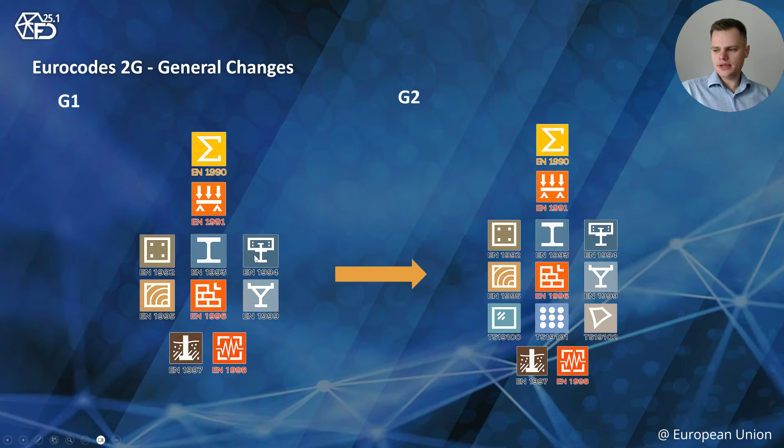You may also ask when we will have the new codes, and the simple answer is now. We are already past the first of the key dates, the date of availability. This is the date when all final versions of the code should be ready and after formal voting. Right now we are in the middle period, the publication period, until the end of September 2027.

All codes on the national level should be published, and then we have only half a year, six months, to withdrawal of the existing generation of the codes. So you can notice how tight the schedule is.

I made a short summary of how many changes there are in the codes, by simply adding the pages part by part. You can see we have over 47 parts in the new codes, over 8,300 pages—this is 70% more pages than the first generation, so a pretty big improvement in page count. For sure, you don't need to read every page from the new generation, but whatever you are designing, it will affect you anyway.

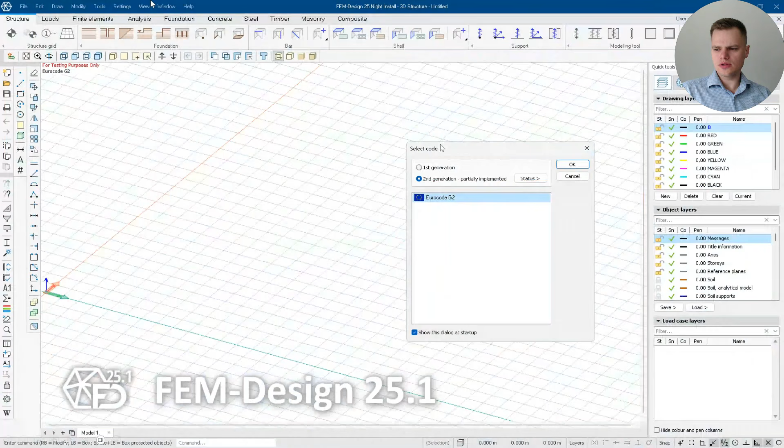In the software, it looks like this: you can select the generation in the dialog at the very beginning when you open the program. You can also check the status of the implementation. You can always change the code in the settings as before, and in every view you can quickly check what code you are currently in at the top left corner.

And we are going towards the changes. Firstly, Eurocode 0, so load combinations. Please be aware that all the changes we are going to present are from the basic versions of the codes, so national annexes may change things a bit in your country.

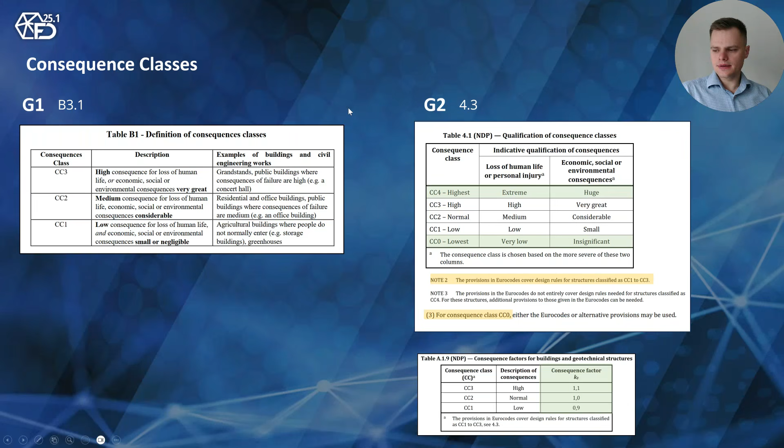First, changes in consequence classes. Previously we had 3 of them, now we have 5. But Eurocode still covers only the middle 3, although you can use Eurocode to design also for consequence class 0, staying on the safe side. These consequence classes are now more strongly connected with the load combinations and more used due to the consequence factor. More on that later.

If you are designing anything from a simple storage house to a high-rise building, you can still use only Eurocodes. But if you are designing something like a nuclear power plant or dam, you may need something more.

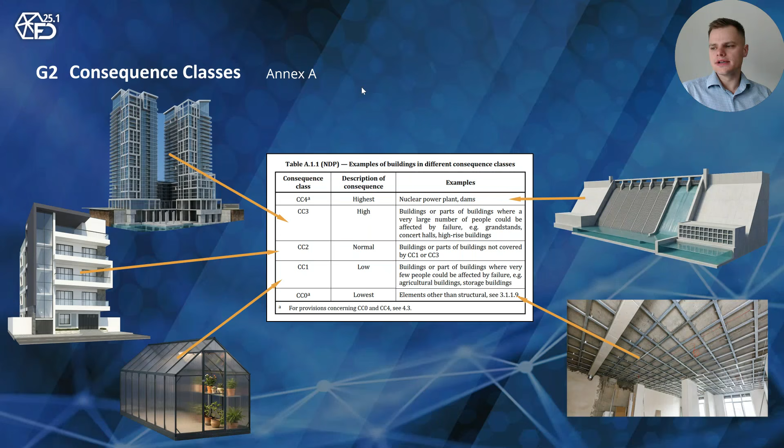On the next slides, I will present some changes in the load combinations and in the load combination factors, and all of this will be based on the ultimate limit state example, so please be aware.

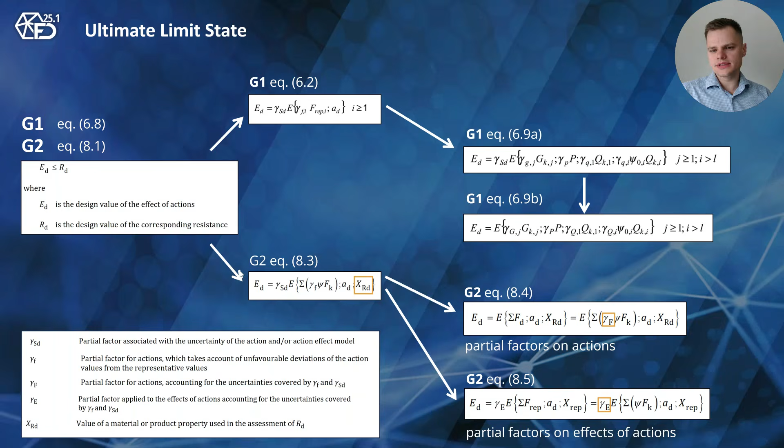In the equation, you have a lot of partial coefficients next to every type of action, and this is still the same in the updated code. You have gamma F, the partial factor on action. What may be new is the partial factor on effect of action, gamma E, and this seems like a new thing, but actually it's not. In the previous code, you already had information that for specific types of analysis and structures like ropes, cables, and membranes, you should use gamma F for effect of action. Now it's the same, but stated in a more elegant way, with separated naming, gamma F and gamma E factors.

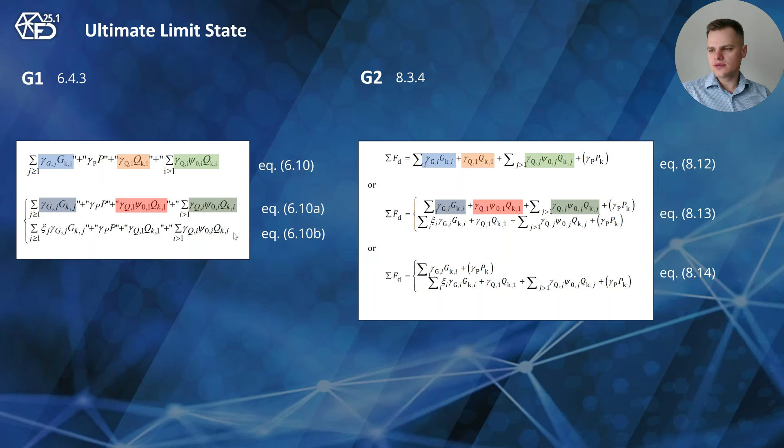You can notice in the equations that right now we have 3 sets instead of 2. New equation 8.12 is the old 6.10. 8.13 first part is 6.10A, 8.13 second part is 8.10B, sorry 6.10B, and the new set is 8.14, but the second part of 8.14 is 6.10B, and in the first part you have only the permanent action.

Next, changes in the coefficients are based on the building annex. Also here you can see that in the new code you have in Annex A more parts for all different kinds of buildings, so all partial factors should be in one place.

The combination factors table is now much bigger. We have the categories F and G connected for vehicles, and also coefficients for vehicles heavier than 160. Some small change for category H, new categories for roof with access, new category for stairs. Terraces, balconies, construction actions, icing, water actions, and waves are also included in the same table.

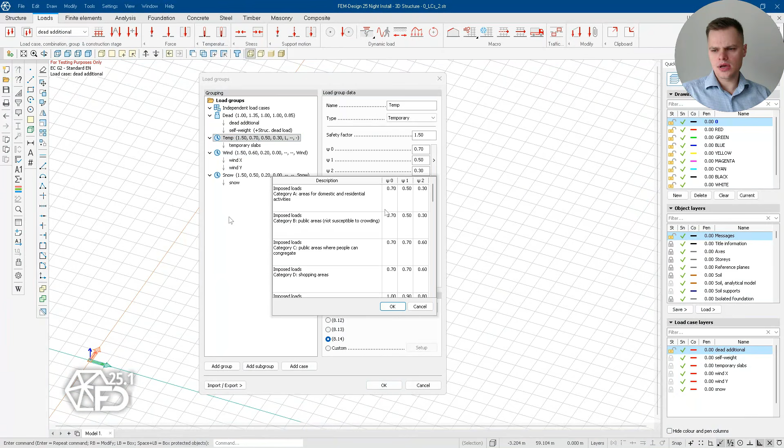In FEM-Design, it looks like that. You can select consequence class and consequence factor here. You can see all updated equations are included. For any load group, you can select from the updated load category table, and as always, you can quickly generate combinations from load groups according to the updated codes.

The new thing may be the single source principle. In short words, the point of this principle is that if your loads are correlated with each other, you can consider their effects together.

It may not look like a new thing and seems natural, but you also have information that for self weight of the structure ground, it's usually like that. But if the permanent action has both favorable and unfavorable parts, you can use this principle only when the structure is non-sensitive to this change of the spatial or magnitude change of this action.

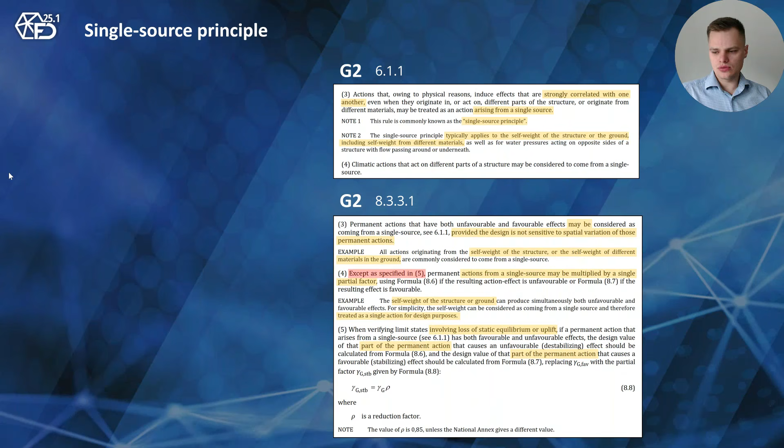And you have also information that when your check is with static equilibrium or uplift check, you should split the permanent action into stabilizing and destabilizing parts.

I have an example of a simple beam here, with a cantilever part, and we are going to talk about the bending moment in the span. From dead loads only, with the single source principle, so using the same partial factor for the dead load action, you can see some bending moment. But without this principle, you get a different bending moment, and this difference is pretty big, 46%, when we add live loads.

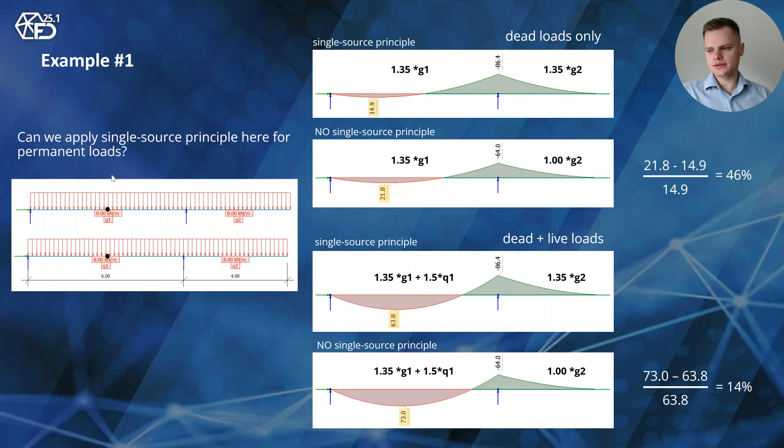This difference is much smaller, but still may be significant in your design. So, in my opinion, usage of this principle is always at the designer's choice.

Next, in the old code, you had different states in your design: geo state, STR state, EQU state. It's not the case anymore. We now have verification cases from verification case 1 to verification case 4.

Verification case 1 is the structural resistance in both structural and geotechnical design. Verification case 2 has two parts, A and B, and this is loss of static equilibrium and uplift, or strength of an element when it is connected with the equilibrium check. This is also connected with the single source principle, and verification cases 3 and 4 are due to geotechnical design.

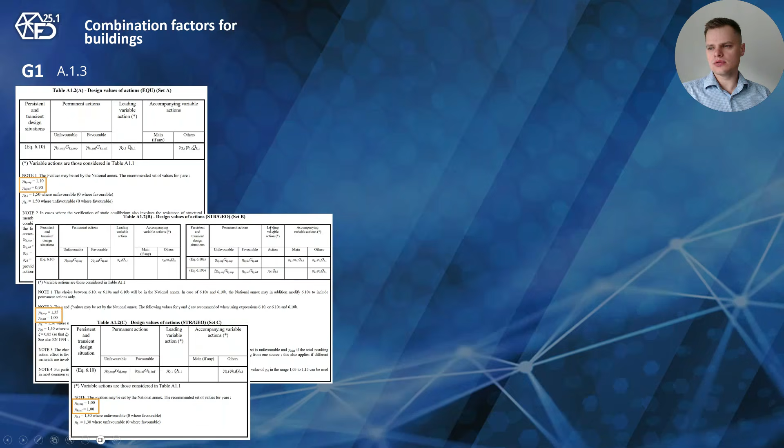So we can say those three sets, three tables from Annex A in the previous code are now in only one table. This table is big with a lot of notes below. I will focus on the most important, in my opinion, parts of the table.

But it's pretty similar to before, so we can say there is a sequence B, A, C of the previous tables. The most important thing maybe is that the base partial factors are still the same, so we have 1.35 for the permanent actions and 1.5 for the variable actions. You can also see in the table KF, this is the consequence factor, and this consequence factor is not next to every factor, but only next to some of them.

So please be aware. The next change is adding water as a separate type of action with a bit different coefficients. And you can see that for every verification case, from verification case 1 to verification case 3, for favorable permanent action, it's always 1.0.

Assuming you are not designing the geotechnical structure, important for you may be verification case 1 to 2. How to understand it: verification case 2b is like you have the basic case, but you treat all the permanent actions as favorable. Verification case 2a is maybe more complicated. It's used only when you have a permanent action with a stabilizing and destabilizing part. Then for the stabilizing part, you have reduced factors.

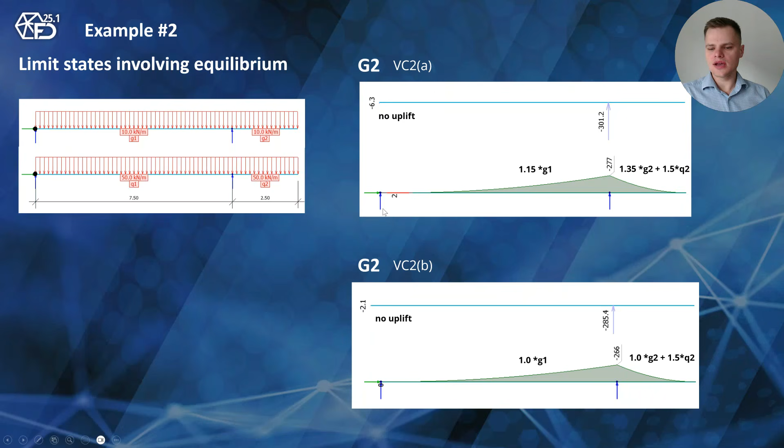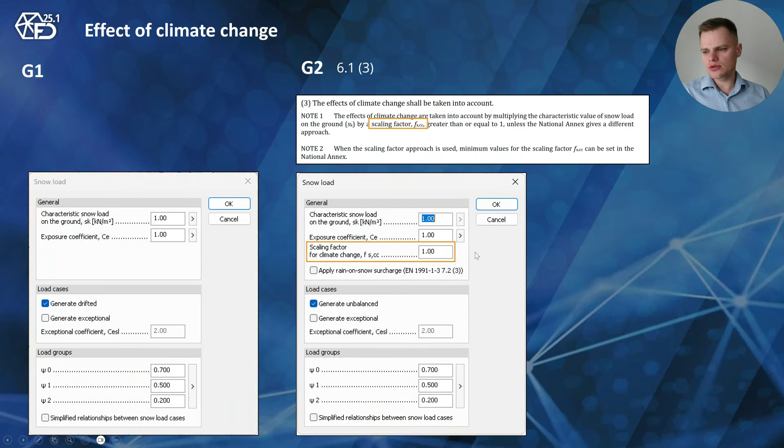Next change, snow load, so Eurocode 1. The first thing new for you may be the scaling factor due to climate change. It's included in the updated FEM-Design here. It's 1.0 for now, but maybe bigger in the next years. Next change is for flat roof.

You may want to use rain on snow surcharge load, and if you tick this button in FEM-Design, it's done automatically. You can also notice some small difference in naming, so drifted is now unbalanced load for snow. We are following the updated code naming.

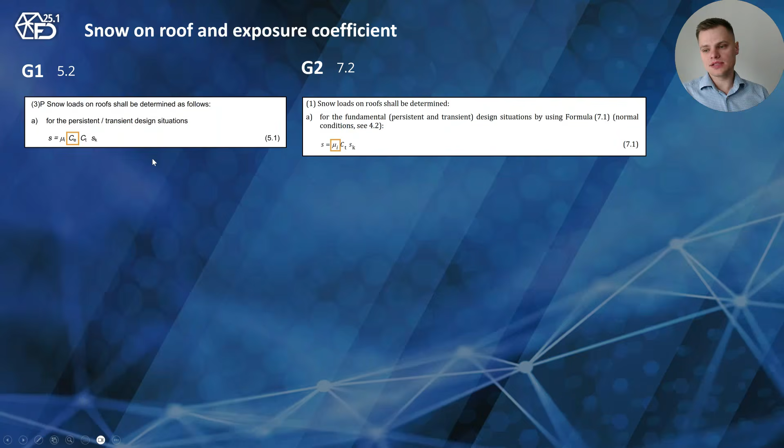When we take a look into the snow on roof basic equations, you can notice one big difference here: no exposure coefficient in this equation. But the exposure coefficient is still in the updated code as it was before, and is also included in FEM-Design, so it has to be used somewhere. And it is, I will talk a bit about that later.

For flat roofs, in every case you had the 0.8 coefficient, it's not the case anymore. It's 0.8 times exposure coefficient for flat roof, so here you have this exposure coefficient hidden. So you may say this shape coefficient is not shape anymore, it's shape plus exposure, and the exposure coefficient for flat roof is not exposure coefficient, it's more complicated.

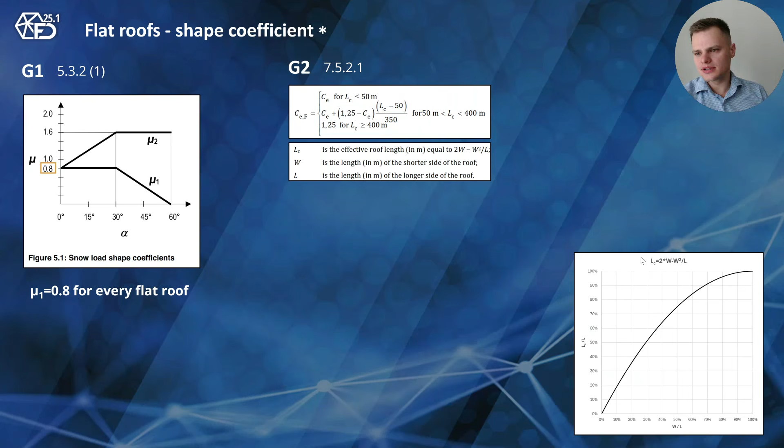This value varies between the exposure coefficient and 1.25 based on the effective roof length, and this effective roof length is calculated from an equation like that. And 1.25 is not random, this 1.25 times 0.8 is exactly 1.0. So from the falling snow perspective, it's like falling on the ground, so a big roof is like the ground right now.

And what is the difference between the codes? We have also a chart like that.

For roofs, when the effective roof length is lower than 50, you have no difference, and then the biggest difference is for roofs above 400, and it's up to 56% change.

Between codes it depends what exposure coefficient you used before. I made also an additional analysis, so the simple rule may be: if your longer side of the roof is lower than 50, or the shorter side is lower than 25, then it's like the old code.

So you are in the first part of the chart. And the good news is that FEM-Design calculates this automatically for you, whatever roof size you have or whatever shape you have, the proportions of the roof dimensions.

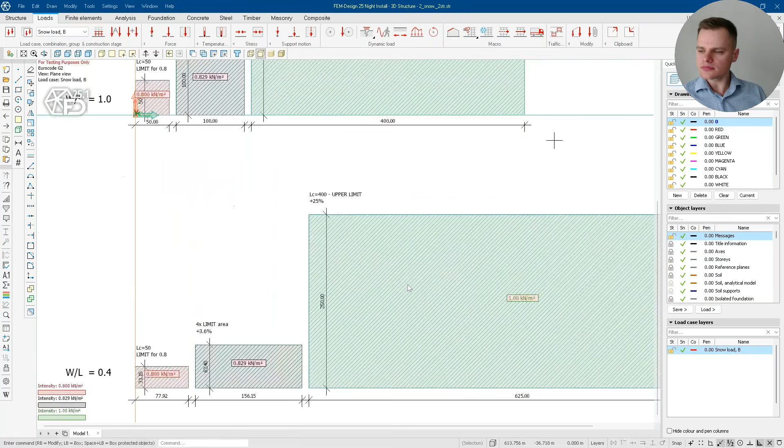After you add the climate panel for flat roof, you can quickly generate the snow load, and depending on what size it was, FEM-Design calculated it automatically. You can see here this from 0.8 to 1.0, so the load on the ground for the bigger roofs.

Next change for pitched roofs. We have still three cases. Case 1 is similar, but case 2 and 3 are different. You have snow load on one side of the roof, so no half of the snow on the other side.

This is the change in arrangement, but there is also a change in the value. After you add the old line to the new chart, you can see the difference in the maximum slope of the roof — this is 70° instead of 60 — and this orange is the exposure coefficient influence. The biggest change is for 30° roofs, and it's up to 50%. So also maybe significant.

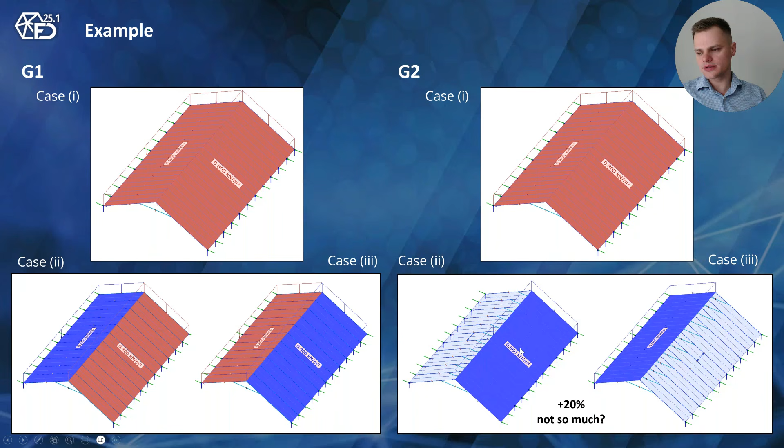Please remember, you have the arrangement change and the value change. So I have a simple example here: a dual pitch roof with the same snow load value in case 1, but in case 2 and 3 you have a 20% difference, so from 0.8 to 0.96, plus the change in arrangement.

And the result changes even bigger. It's 93% when you compare the maximum displacement of the roof structure, so pretty big change, and it's 61% in bending moments in my case, of course. But I think when you have a situation like that, 30-degree or close to that slope, there will always be a change in your roof load.

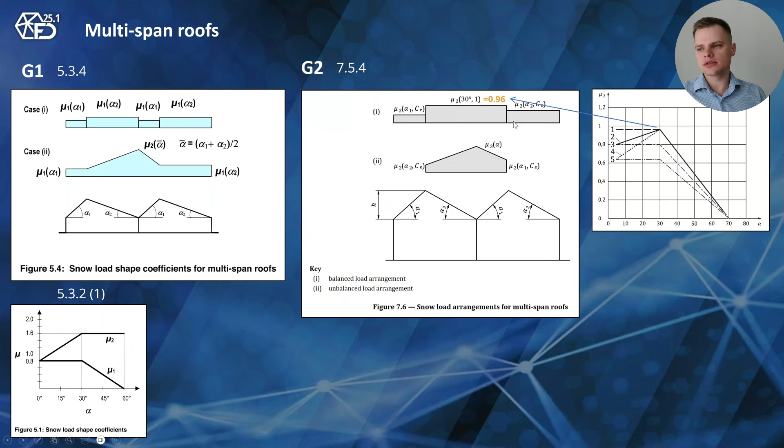Next roof, multi-span: you have a change in both balanced and unbalanced load. For balanced, you have a constant coefficient in the middle part, and for the unbalanced, you have different arrangements, so only the snow in the middle of the roof, and also more conditions.

Also due to the height of the roof. So we might say that right now the load is not following the line; it's following the area below the line, and also the basic coefficient is higher — so we are starting from 0.9 instead of 0.8.

Next, maybe not a change but a new thing in the code: flat roof with tilted panels. It's added, you can calculate it now. And also new, roof close to a taller construction. It was always in the code, but right now we have a detailed calculation method for the constructions when there is a gap between them.

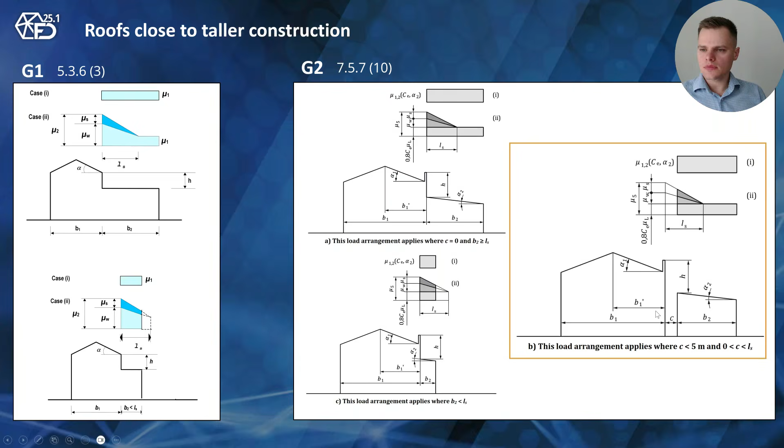Also, a good thing here is that all those changes I mentioned are right now included in FEM-Design. You can see a bigger configuration dialog here, and I have a short example.

I am adding the climate load panel with tilt for flat roof with tilted panels. You have to select the slope of those panels, then you can change the height of those, and after that you may want to configure additional edge objects.

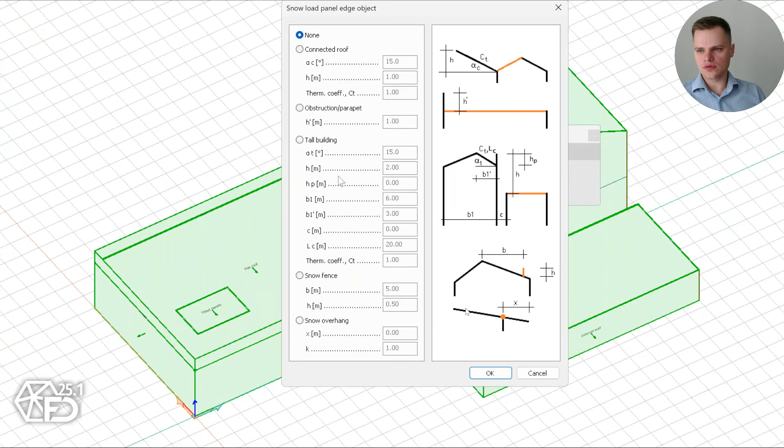I did it before, so I just generate the load, and you can see all the load cases are there due to all kinds of different checks — also the tilted panels, also multi-span roofs, everything there — added to one load group with custom load group relationships, ready to use in your design.

Next, Eurocode 2, so concrete design. Concrete and table 3.1 — I'm sure you know this table, and this table is named 5.1 now, and it's much smaller as you can see, but I made it bigger so we can directly compare and see the changes.

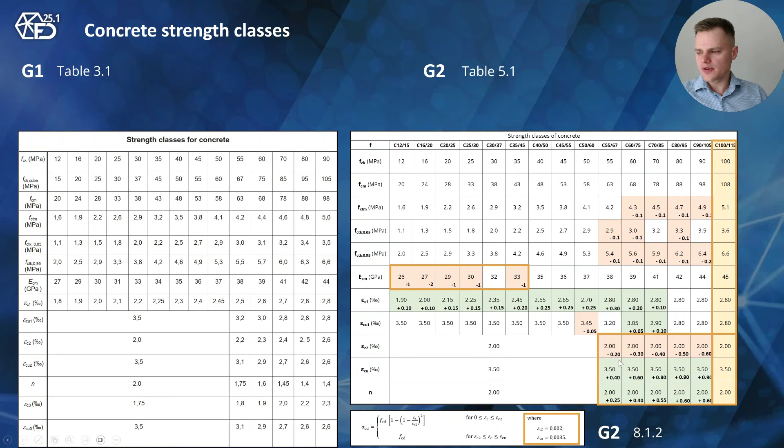And maybe we can focus on three areas only. So the new concrete class, C100/115. The Young's modulus for the lower class concretes is now lower, and we have unified compression strains for all classes, so 2.0 per mille and 3.5 per mille in your design.

When we are comparing the design compression strength, we can see more differences here due to the additional ductility factor. So for every concrete class above C40/50, we have a difference, and it's up to 20, almost 24%.

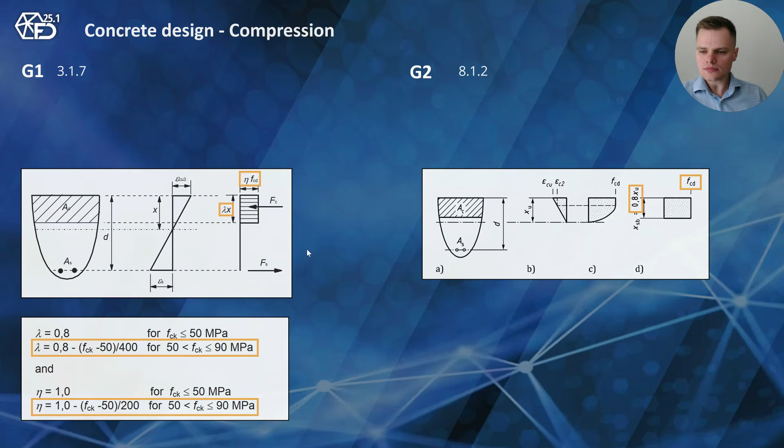You can see the comparison here, and it looks nice in the presentation, but it's not totally fair, because when we take a look at the simplified compression stress block distribution, previously we had two additional factors: the effective strength and effective height factor. It's not the case anymore, so we just have 0.8 and the design compression strength. After taking this into account, the difference is much smaller. It's still there, but much smaller.

The next change connected with the concrete classes is the strength reduction factor in shear. In the old code, it was always connected with the concrete class, the concrete strength. It's not the case anymore. You can see that it's included in the new code in many places with different values, but in no equation is there FCK.

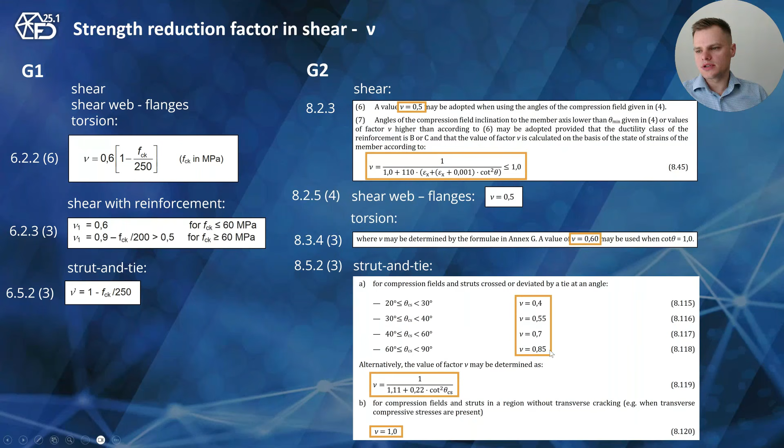Okay, thank you, this is all from my side. Yoni will talk a bit more about shrinkage and creep calculation according to the new code.

Thank you, Jan, for the presentation. I will mostly talk about the modifications in concrete design. We start with shrinkage and creep, and because the new Eurocode has an annex which defines those models, we have implemented them in FEM-Design.

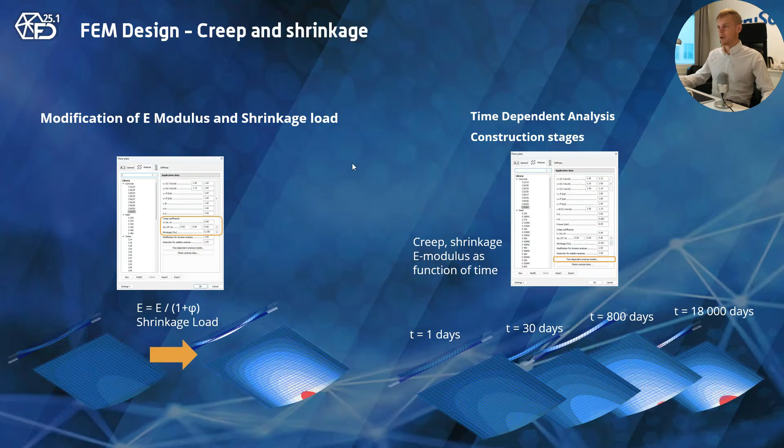First of all, we have two methods in FEM-Design to take creep and shrinkage into account. We can do static or quasi-static analysis with modification of E-modulus and shrinkage loads, so everything will shrink and curve if you have rebars or unsymmetrical rebars. Then we have time-dependent analysis with construction stages, and you get results of all those intermediate stages. Those new models of the new Eurocode will work on both. They're under the properties of walls, slabs, beams and columns, and if you click those, it works for both.

The creep model is not that different, but the shrinkage model gives a bit slower early drying with the new code, especially if you have an accelerated construction schedule. This might be important for you. So it's less aggressive in the beginning with the new code, but eventually the new code will catch up.

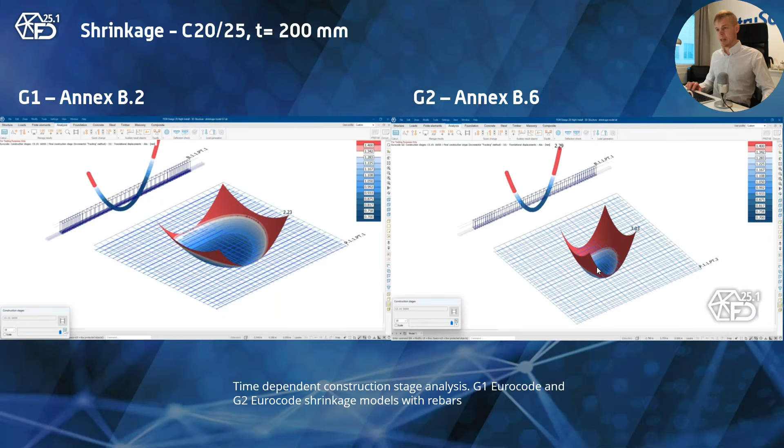I have an example here: the shrinkage model, and you can see now they follow Annex B.6, which is the new code. The left side is the old code, so it will shrink faster in the beginning and curve faster, but in the end the new code will catch up. Here's an example of TDA analysis, and it's a good demonstration of how they work.

Then we have some modifications in the minimum reinforcement calculations and detailing rules of elements. First of all, the Eurocode divides the minimum rebar checks into two sections. The first is for crack control, where you have predictable crack behavior and predictable deformation behavior, which is important for long spans and crack-sensitive structures like water retaining structures.

The second part is the minimum according to detailing rules, important also for long spans, but also short spans. So if you have a high stress part and low span length, the latter part will govern so that you have ductile behavior after cracking—there's no sudden drop in stiffness. The idea is that you design rebars to ensure ductility, so the curvature-bending moment curve is sloping upwards all the time.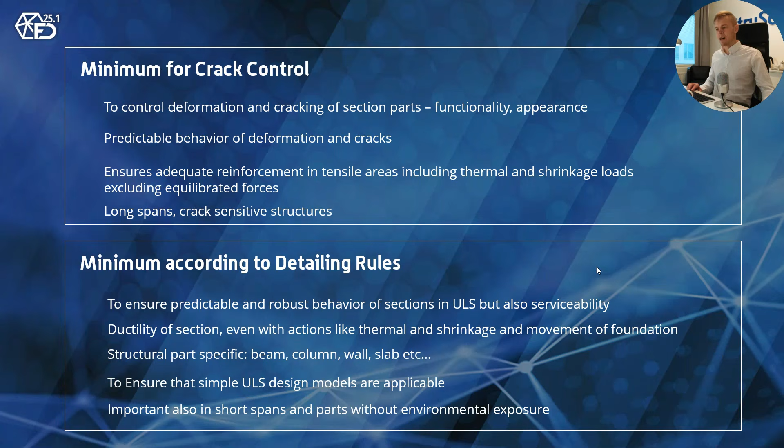So we have a few new equations. I won't go too deeply into these first ones—it's just the minimum for crack control, which is important because we calculate the exact cracking in FEM-Design. The rules have been modified a bit, but there's no dramatic changes. We also have a new simplified method if you want to simplify your life.

There's Annex X, which is a totally new thing, and you can look into it yourself. Here's the content of Annex X and how it simplifies those equations. But let's go to the parts which have been implemented in our software.

First of all, the old code used to have stress checks for elements. This meant that if you had a lot of compression, you tried to limit it to avoid longitudinal cracking in certain exposure classes. Or if you wanted to avoid yielding of rebars, you had certain stress limits for rebars, and they were in text format. The new code will be much more user-friendly—that was one of its goals—so now you can see they've put it in a simple table, one for the rebars and one for the concrete.

So if you have to do those stress checks, now they are in one single, stable and easy to use location. So how do you set up them in the new version of FEM-Design?

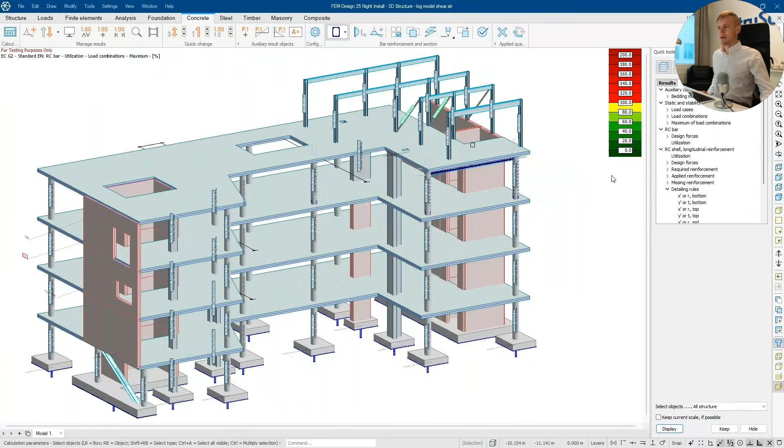First of all, here in the total concrete settings, you can set those stress checks. Second, we have one more setting under the members - under the slabs, beams, and walls - it's here, the stress limit for the concrete. And finally, you can have them in the main report. Previously, they were in a separate table in the reporting module, but now they are part of the main report of the elements, and you can see that now they have been implemented there.

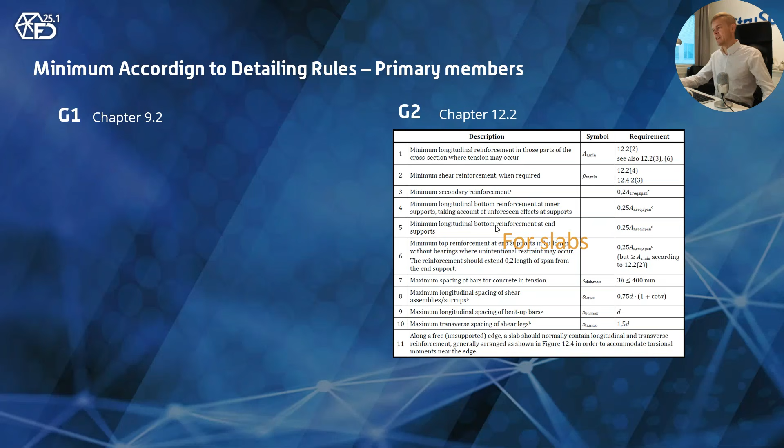Then we can talk about detailing rules of primary members. In the previous code, they were scattered all around the code. So if you want to design a beam, or a column, or maybe a wall, there's a lot of rules. And now if you look, you have one simple checklist for slabs and one for the beams. It's really handy because you have a single checklist as a designer - you just go through the points 1 to 12, and then you have detailed your beams.

And there's one new thing: if you have a really high beam, over 600 millimeters, you have to add a few bars on the sides of the beam to avoid cracking. So that was not there before, but it's good that it's a clear list for the designer.

Then the minimum rebars for the beams and slabs, to prevent or ensure the ductility of the members - previously it was a simple fixed formula for slabs and beams, but now it's more complex. So the new code says that you either have to design against the cracking moment, or if the stresses are below the cracking moment, you have to leave some safety margin for the cracking moment.

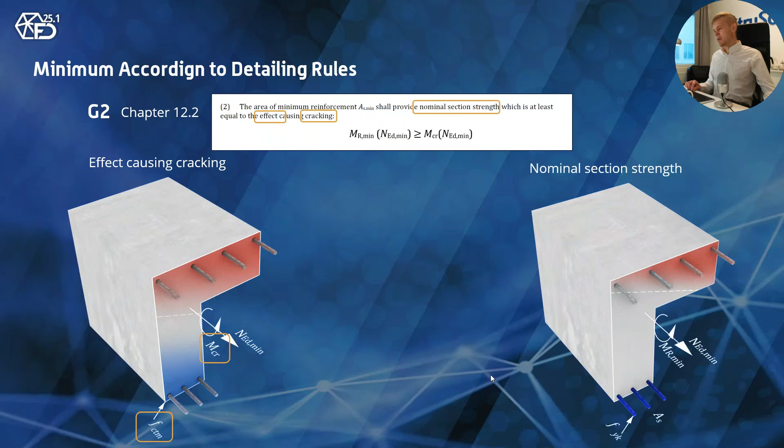What it actually means is that you have to take the normal force of the section, and then calculate the cracking moment with that normal force, and then design your section capacity. So minimum rebars is now a capacity against the cracking moment, which is a better definition of what really happens. It means that if you have a lot of tension, you need more minimum rebars compared to the old code, and if you have compression, you need less, to guarantee ductility against the cracking moment.

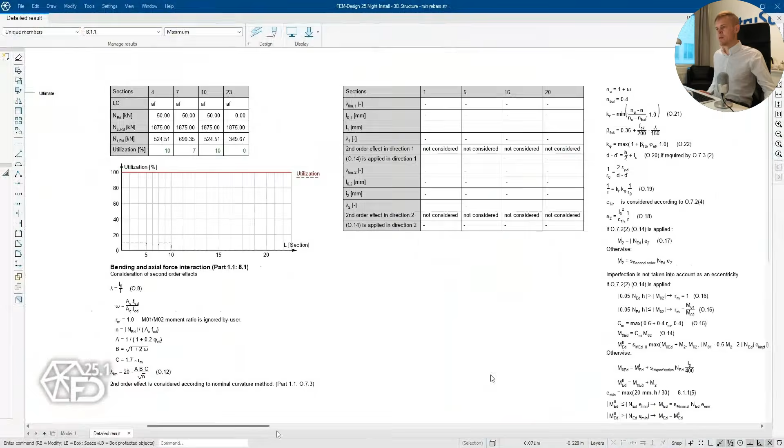And how it's done in the new version of FEM-Design: if you go to the properties of the slab or beam, and go to the report, to the minimum rebar section, you can see that it's now following the rules of the new code. Instead of taking this fixed formula, we are calculating the cracking moment for the certain normal force. And of course, if you have just tension, then we design the minimums against the total tensile capacity of the concrete.

Now the new thing is that we do not see square millimeters in the table. There's the state - is it cracked or not - and there's the cracking moment, but we see the tensile capacity. So here's the requirement, and then there's the capacity. We only see how much capacity we are getting, the tensile capacity of those bars, and that is the minimum rebars in the new code.

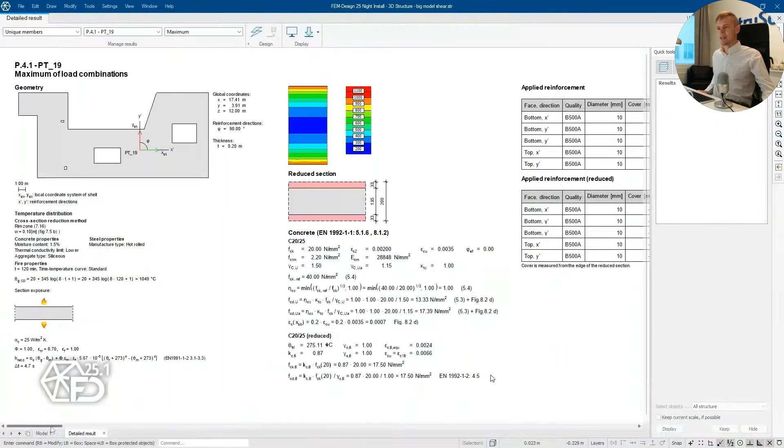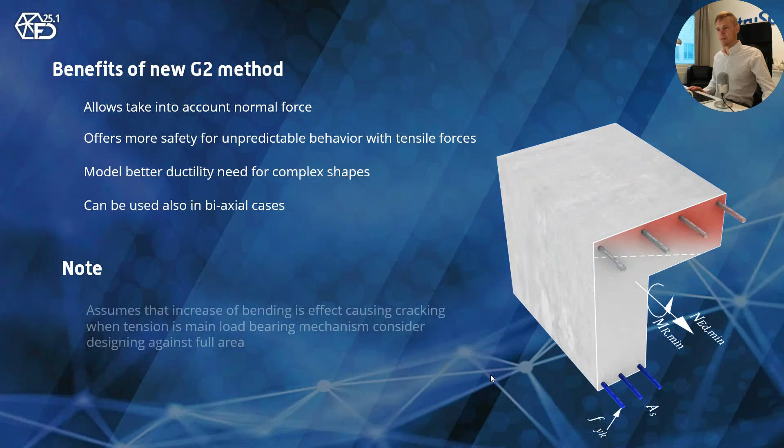A few notes: it allows us to take into account the normal force, and gives more safety if you have a lot of tensile force, and it's better for complex shapes because you can apply this method to any shape and biaxial cases. But of course, if you have small bending and the main loading is tension, I will still design those minimum rebars against the tensile capacity of the concrete to ensure the ductility of the section.

Then we have a few modifications for crack calculation. So we have an effect of stabilized cracking, and also a better understanding of the transfer length between those cracks.

So let's take a case: you have a foundation which has been cast a lot earlier before the base structure. And the new dialog in the software will ask you this - is this an edge case or is this a tie case? And it can be confusing in the beginning, what they mean by tie and edge.

But let's now cast the walls to the structure. So these are cast in situ concrete, and now they are connected.

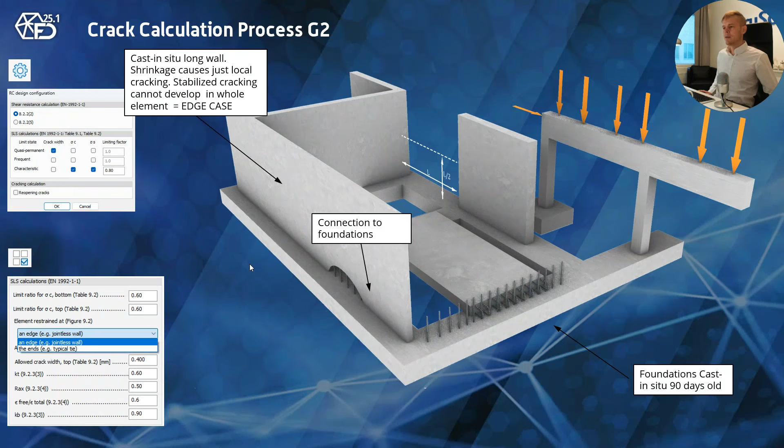Of course, when shrinkage happens in the concrete, it will cause a lot of tensile forces in the bottom part of the wall and compression to the foundation. So it means that if the first crack appears in the wall, the stresses cannot balance in the whole wall. The first crack will not release the stresses in the wall, and that is why it's the edge case.

So every time when you have something preventing the movement of shrinkage at one or two of the edges of the member in the direction of the shrinkage, then you have the edge case. So edge case is more about the cracking due to shrinkage which is restrained.

Then you have the tie case, like a floor slab connected between two massive foundations. It's only connected at the ends, and if you have cracking or a first crack in the middle of the slab, it will release the stresses in the whole element. Then a second crack appears, then a third and fourth, and suddenly there's like 30 cracks, and the stresses are balanced. So it means it's a fully stabilized cracking.

Also, if you have external frames or a floor slab over the walls, then it's also a tie case. So this is a tie case, this is a tie case, and if you have a wall cast between existing structures, if it's a short wall, the bottom part will be the edge case, and the top part is the tie case.

And the ratio limit is L divided by 2 in the Eurocode, so it depends how you want to design the cracking.

The time factor, KT, is now also not only a function of time, but also of whether it's the formation stage of cracking or fully stabilized cracking. So it's no longer fully bound to time.

And then you have a new bonding factor here to take into account the bonding conditions of the rebars.

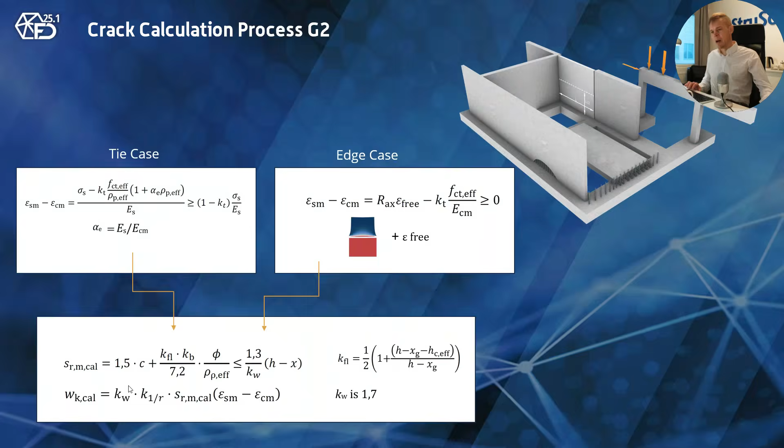And here's how it's implemented in the software: if you look at the beam, first the cracking limit state is set here, and then we have this setting of edge or tie, and if it's a tie or edge, you have to apply R and other properties. In the report, you can see that now it uses the new formula.

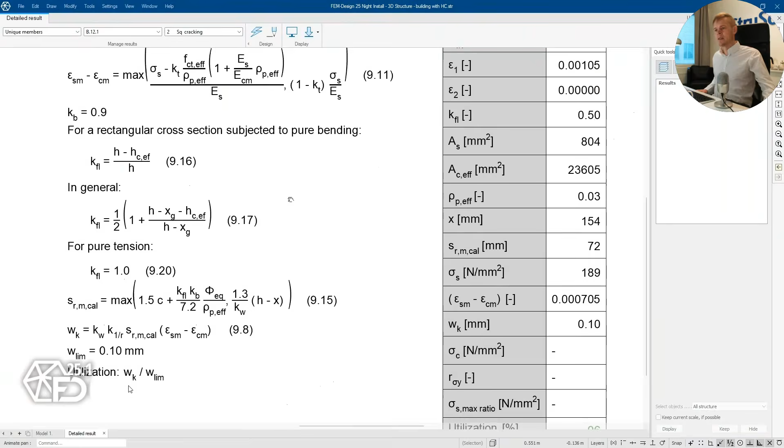Here's the utilization of the cracking. If you go inside the design report of this beam—and it works equally with slabs and walls—you can see it's a tie case, so it's not prevented at the ends, only tied at the ends, and then you get your utilization for cracking.

Shear design is probably the thing which changes the most with the new code, so it's more unified across all the shear design tasks.

In the old code, we have this formula, and if you look at the new code, it doesn't look that different. But if you actually look at what's happening behind the scenes, previously we used an experimentally calibrated formula for shear design. Now the chapter is different, but also we are using critical shear crack theory, and instead of comparing the shear force, we are comparing tau, which is shear stress in plates and beams.

A problem with the old code was that it was used beyond its original calibration scale. So with thick plates, it was too unsafe. And it doesn't take bending into account, because bending will open cracks in the top part of the plates or beams, and the new code will take bending into account.

Also, one problem with the old code was that it was difficult to design foundations, because foundations required iteration of the perimeter, but we will go deeper into that in the shear design or punching design section.

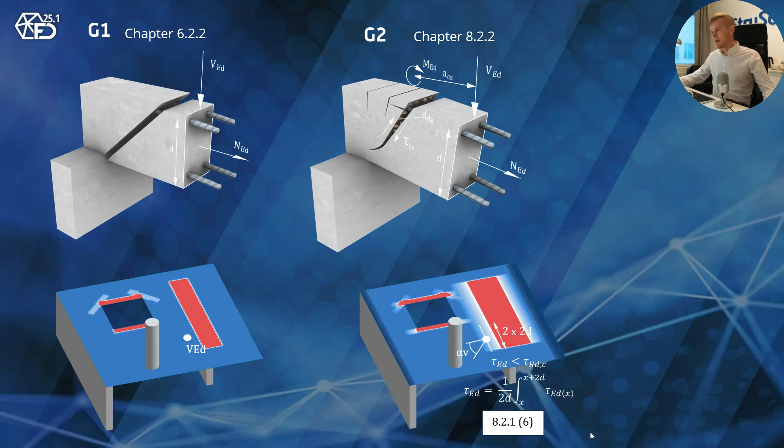First of all, in the old code, we just took the shear force of the plates or beams, but the new code has more plate-specific rules, so we can average the shear, we can look the angle more. So if you look at these rules, also how you handle rebars has changed a bit, because in the old code the requirement was fully anchored rebar, and in the new code we can take the effective rebar.

So this is the effective rebar data model of FEM-Design. So we actually can take the anchorage into account in the shear capacity. And if you look at those plate-specific rules, we have a lever arm, which is for each of those finite elements will get a different lever arm. And also this is the formula for the shearing angle.

And a totally new concept is the ACS, which is shear span. So it's a ratio between the bending moment and the shear force in the plates or beams. And that takes the bending into account. So this is actually the distance to the contraflexion point of the bending moment. So bending moment 0 point, or where you have to place your shear force, so the bending moment is 0. So that's the distance to the contraflexion point, or shear span.

Then we calculate the shear span factor, so that is a new thing. And also one new thing, well, KVP takes the normal force into account, but also aggregate size, because this new critical shear crack theory will take the shear with the 2 or 3 mechanism. First of all, we have a doweling action of the main rebars, then we have an action of aggregate, and then we have a compression strut to the support. So there's like 3 mechanisms to carry the shear. And we modify this value with these factors, which is KVP and the shear span factor.

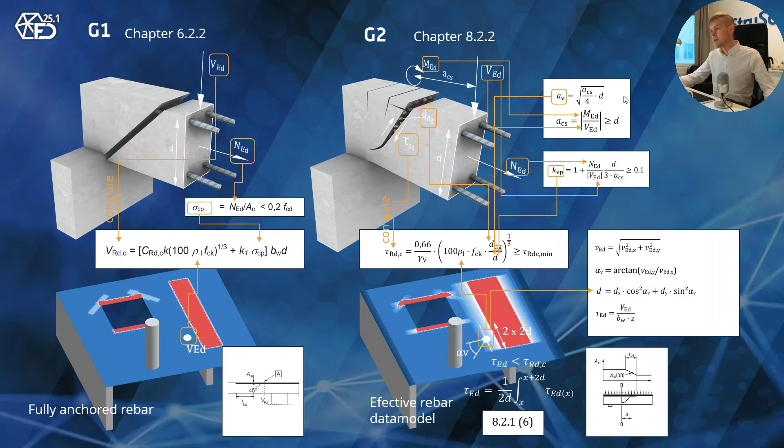So how can you do it with FEM-Design? Let's look at how it's implemented. And here we are shear designing the plates, but it's exactly the same if you design beams. There's the cotangent, we will go deeper into that in the later sections of this presentation. But let's look at the results of the shear design of this plate outside of the punching regions.

So we can see VED, but we can also see tau. Tau is the shear force or shear stress of the elements. And if we go inside here, let's look at what is inside of the report.

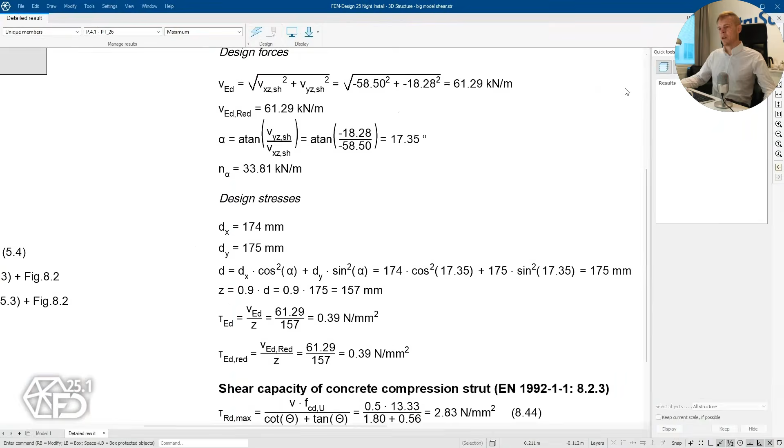So first of all, we can see we have implemented these new rules, so the shear force rules and shearing angle, and the normal force in that shearing angle. Then we calculate the lever arm with the new formula, which is a function of the shearing angle and also the Z value. Then we calculate the concrete compression capacity, the strut part of the strut analogy with the cotangent value. And when we calculate the shear capacity without the shear rebar, of course, the effectiveness factor.

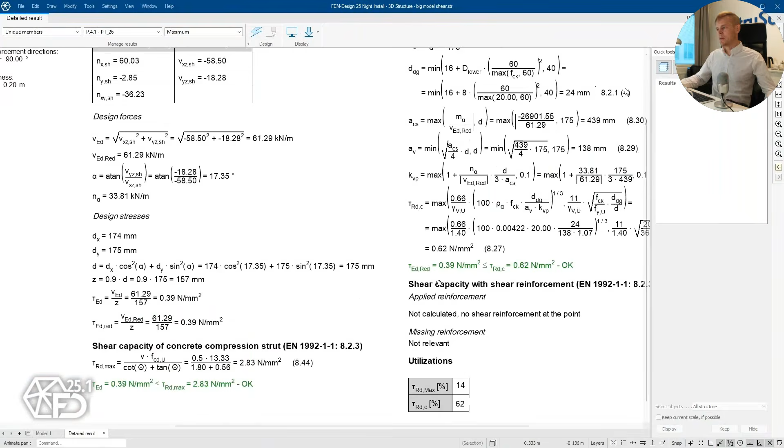But here they are, so the aggregate size is taken into account with the DG, and then we have the new property, the shear span. So we can say that we are about 450 millimeters from the contraflexion point. Then we take the normal force into account with the KVP, normal force in a certain direction, and then we calculate the shear capacity without the shear reinforcement in this plate. And then we get the final utilization with that data.

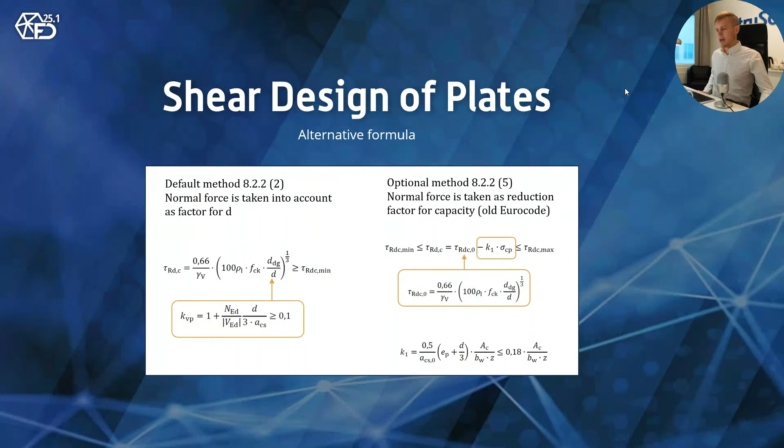And it's important, what I wanted to show, that you have to check the actual anchored rebar. So you have a data model of anchored rebar in FEM-Design, and that is really handy, that you get the exact right applied quantity to the shear design.

So we also have one alternative formula for how we can take normal force into account, and this is almost like the old code. So we have a sigma CP, compression or tension of concrete. More tension you have in your section, less shear capacity you have, and that's still in the new code. But this is an alternative method to the previous method. So we calculate this sigma CP, and we still take the shear span into account.

So if you want to go to this alternative design in the new FEM-Design, you go to the main settings of concrete, and it's under the main settings here. You go here, and here's the alternative method for shear design, and now it uses the new formula for how to take the normal force into account.

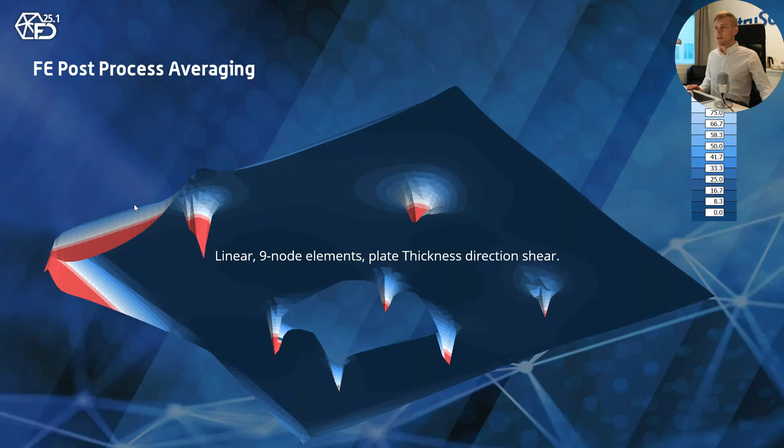Then we have a totally new thing: we can average the shear stresses. Typically when we have a plate, we have huge shear force peaks at the edges of the plates, corners, and of course close to the columns. This is very typical. And of course, anything calculated with the shell model beyond the effective depth of the slab is totally unrealistic, so you cannot take it into account.

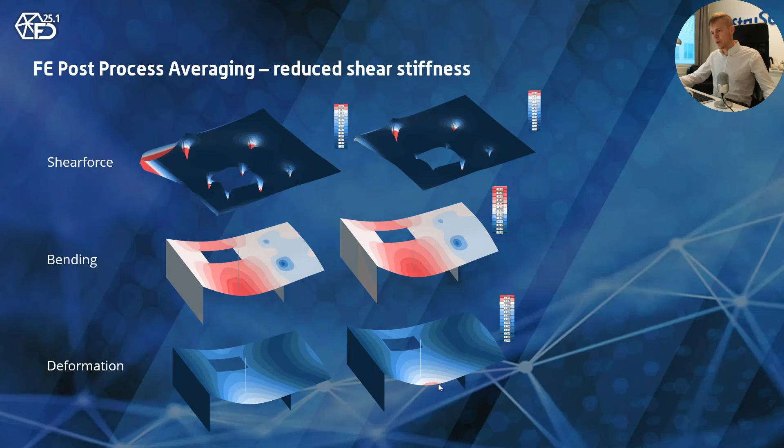What is new in the new code is that we have rules for this. One solution is that if you reduce the shear modulus, this is not in the code, but this is what you can do to reduce the shear stiffness, and that reduces those peak values compared to the linear model without any shear cracking. But the downside of this method is that the deformations will increase because there's more shear deformation. The new code will give you a method where you can average the shear forces over a distance of 2d on both sides of the peak value.

How can you do it in FEM-Design? Well, this is the end result when you average those shear forces, so the problem with the edges and hole corners totally goes away. This was the old tool we always had in FEM-Design, but the new code will give you exact values. So the 2d distance is the exact value for how you do it.

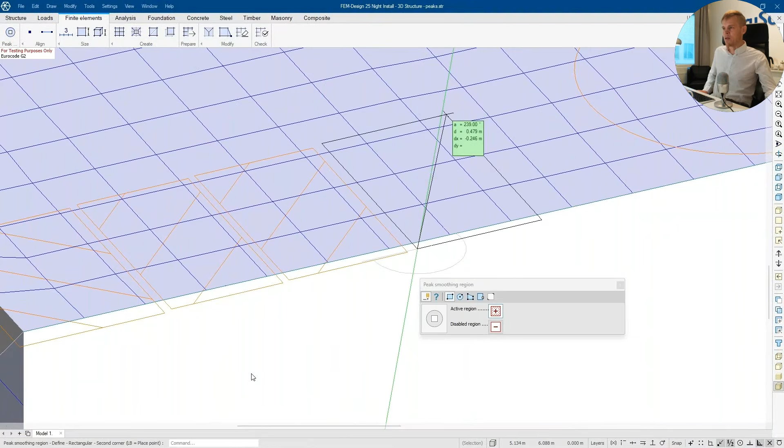So you just draw separate peak smoothing regions. They cannot touch each other, because otherwise it's considered one big region, like two-way averaging. We just want one-way averaging, so you have to set the constant shape function in the settings of the software, following the recommendation of the Eurocode that it's a constant shape along the average region. This way we can do one-way averaging in FEM-Design.

Punching is also one of the things that changes a lot with the new code, because the new thing is that the critical perimeter is much closer. If you compare the formulas, they are here: left side is the old code, and the new code is on the right. We have a bit different definition for the perimeter. Also, the old code has this problem that you have a beta factor which takes the unevenness of the shear into account, and the new code has put that beta into one simple table. So the readability of the code has improved a lot, because there were like 5 pages of how you calculate the beta in the old code.

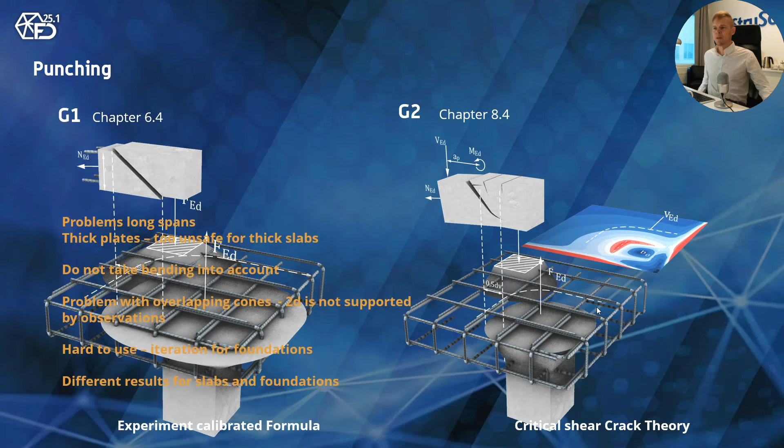So also here, we are switching to a critical shear criteria. The problem with the old code was that it was unsafe for long spans when there was a lot of cracking over the punching region. It was unsafe for thick plates because it was calibrated for thin plates, and it doesn't take the bending into account, because if you have a long span you have a lot more cracking. It was also hard to use for foundations because it required iteration of the critical punching perimeter. But that is no longer the case with the new code. That is no longer needed, and it always gives you different results for slabs and foundations.

Also you had this problem: if you look at this example, if you design foundations with slabs using the old code, they were always overlapping cones. With the new code, when we are calculating the punching only at a distance of 0.5 times dV, or the effective depth, we can find totally new failure modes in the foundations, because those cones are no longer overlapping in the new code. So it's more realistic, you find those critical modes, and also you don't need that iteration, so it's easier to use.

So this is the formula for the new code, and you can see that the formula is exactly the same as for shear design, so it basically should give you the same results. The only difference is that the shear span, how we take the bending into account, is a bit different. So you calculate the shear span in X and Y direction, and then you average those two into one number. The kn factor is still there for how you take the compression-tension into account.

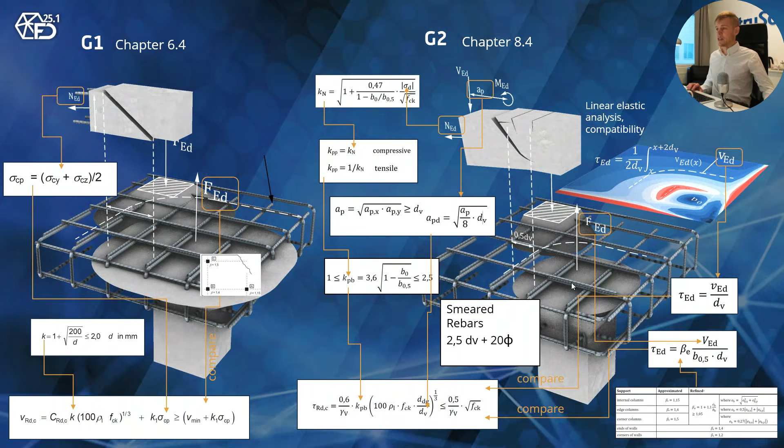And what else? There's a new method to take the shear forces directly from the plate and average it, but we'll talk about that later. Then we use smeared rebars, and we have to extend beyond 2.5 times dV plus 20 times the diameter. But other than that, it's basically the same. Now it's unified also with the shear design.

So here are a few examples of how you can use the nodal force method. In this method, we take the nodal force of the column or support directly, and in FEM-Design it's done here. You still have two types of punching: you have column-wall end punching, and then you have column punching. If you go to the settings of punching, we can set the nodal force method here.

So here we take the nodal force and then use the beta factor, which we can calculate automatically, or we can set it ourselves, just like the old code. So we take shear force, then we have a Kn factor to take the normal forces into account. The more tension there is, the less capacity there is, and then we calculate the shear span. So we are roughly at 800 millimeters from the moment contraflexure point. Then we have the aggregate size factor, DG, and then we can calculate the exact capacity of the section with this formula.

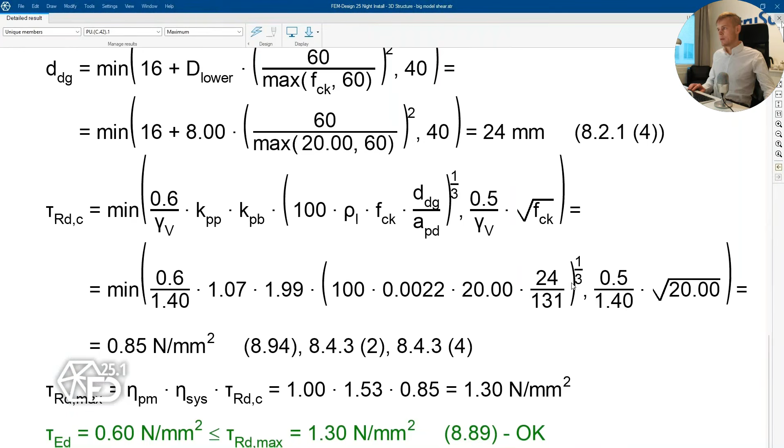Now maybe we take a more complex example of how we can reduce those regions. So here are the formulas for the punching calculation of the new code, and you can see that they have been implemented in FEM-Design. So the proximity of the holes will cut the outer perimeter, but not the inner, and then also the punching perimeter has to be stopped like half of the distance to the edge. That is also a new thing in the new code.

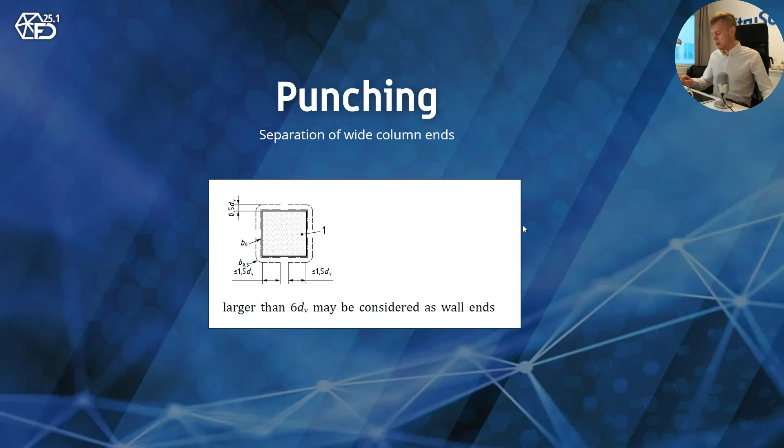What happens when you have wide walls? That's a new rule in the new Eurocode. If the distance is larger than 6 dV, let's see what happens. Here we have an example of a really wide wall in the model. We could do it as a column, but the downside is that it divides as it should and takes the mid part away. The real downside is that we get a single punching force, so it's really difficult to distinguish what is the right-hand and left-hand punching force. It's better to model the actual object as a wall instead of a column, because then you can separate and get separate design forces for end 1 and end 2.

Then we have the concept of smeared rebar and extension of rebars, and that is more important in the new code because we calculate the cracks so closely in the column head. There's a lot of cracking also outside of that region, so it's important to extend those rebars.

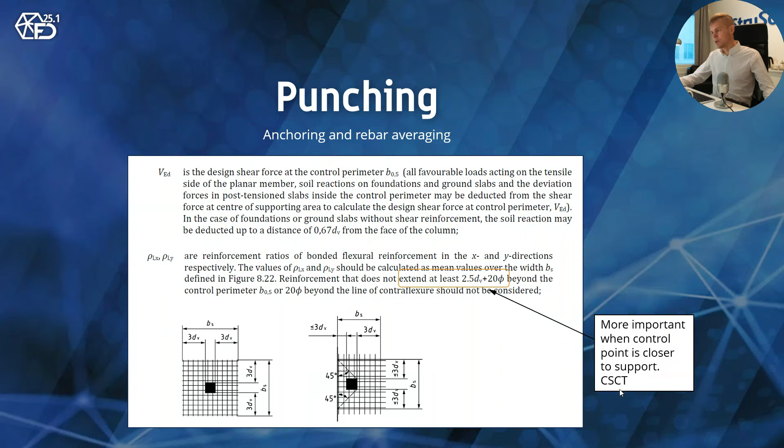Here we can see how it works in the new FEM-Design. If you go to the applied reinforcement, here we can see that we have applied some additional reinforcement over the column head, and here we have extended them way beyond the recommended distance. In this example, they are not extended to 2.5 dV plus 20 times the diameter, which is a proxy for anchoring. We check the report.

If you look at the mechanical reinforcement ratio, we get 0.022, which is just the base mesh quantity. If we go to the second column where the rebars have been extended way beyond the control perimeter, we can see now we get the full capacity of the additional rebars, so the reinforcement ratio will increase. So again, the data model of anchored rebar is much more important now with the new code.

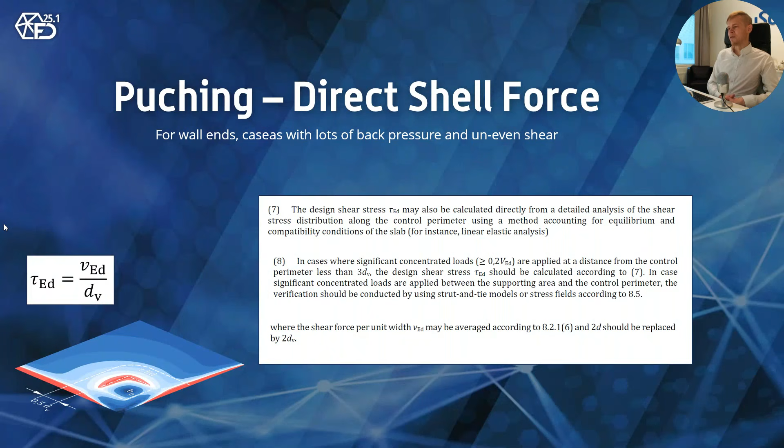Then we have an option in the new code that was not in the old code: we can actually take the tau directly from the finite element model, using a linear elastic finite element model to approximate. So we don't need the beta, we can take the unevenness of the shear force directly from the finite element model. Let's see an example of this behavior.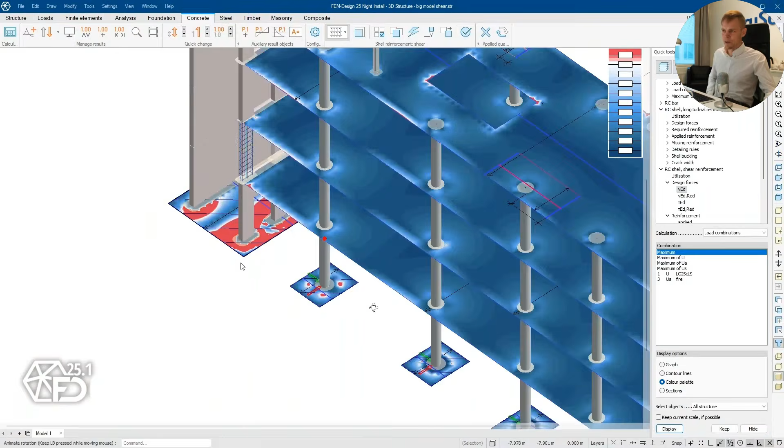Here we have a shear force, and here we have a tau. If you want to see the megapascals, of course they are kind of the same thing. Here we have a few examples - foundations are usually a good candidate. We can see on the left-hand side the punching is totally uneven, and it's really difficult to take into account with the beta factor. Here's another example of unevenness of the punching force.

But bear in mind that you need a really high quality finite element mesh to do it properly, so you have to make a denser mesh close to the column head too. You can see it like 115 on one side and something like 47, 44 on the other side of the column.

And if we now look at the punching utilization, if you have set the method to shell force method, like here, instead of nodal force method, and we take the maximum value, we can take the unevenness of the punching force directly with the finite element model, as is illustrated here. So it takes the shear force divided by dV, which is tau, directly from the model. And there's even an option that the new Eurocode gives you, where you can average.

So if you want to get more capacity out of your column heads, a certain type of shear yielding is allowed, and you can average.

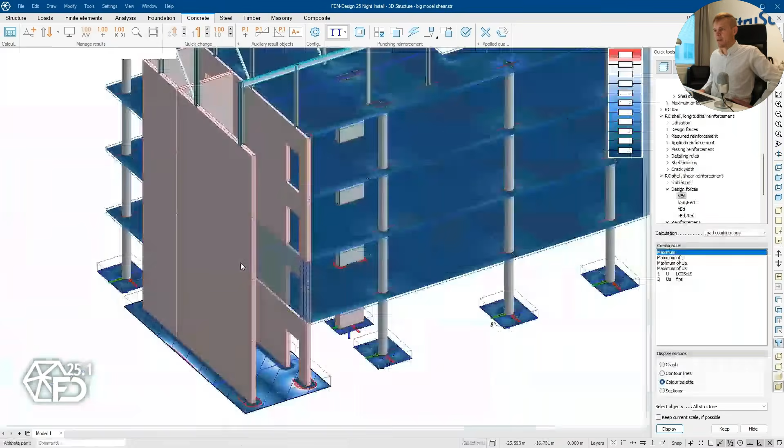And also we can use the same calculation, same parameters for foundations, because iteration is no longer needed for foundations in these cases. So it's much easier to do, and probably you want to know how much it varies. Here is the end result.

So what does it mean in shear when you go into the next generation of Eurocodes. First of all, you are going from a calibrated formula to a more complete understanding of what really happens, based on fracture mechanics of solids. It's more plate specific, so it gives you better rules for plates, but it also gives you more specificity, so you have to follow these rules.

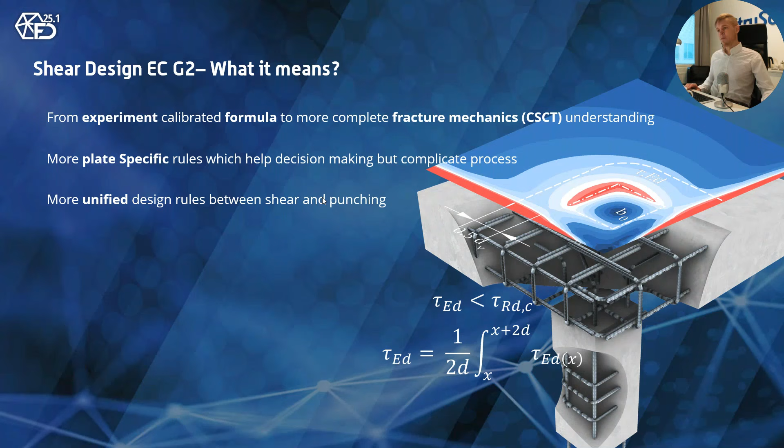And it gives you more unified rules between shear and punching, because you use the same formulas for both. It gives you a more realistic outcome in thick plates and short spans, and if you have compression, you might get a bit higher capacity in the section. You get the interaction of bending, and you can also take the aggregate size into account in the shear. Finite element models with rebar data models are now really important to take with the anchoring.

And then a few examples of how it changes when you have shear reinforcement. Here we don't have a new method in Eurocode. We are still using the variable strut and tie method, or variable angle strut and tie.

How it worked before: there is a theta angle, and you can choose it so that cotangent theta is between 2.5 and 1 in the old code. There were no limitations. And of course, if there's not a lot of shear force, you usually choose 2.5 to get the lowest utilization of the rebars and highest utilization of concrete.

And if the shear force is really high, then you optimize the theta angle so that you don't have to increase the concrete strength or the plate thickness because of the shear. So instead of that, you just put more shear rebars.

But the new code, there's a difference. First of all, the ductility class will be introduced in the cotangent selection of shear design or shear rebar design. So it means that you have a lot of limitations on how you can choose the cotangent theta. And also the old code used a simplified effectiveness of cracking factor to take the cracking into account in the shear. Let's look at the modification.

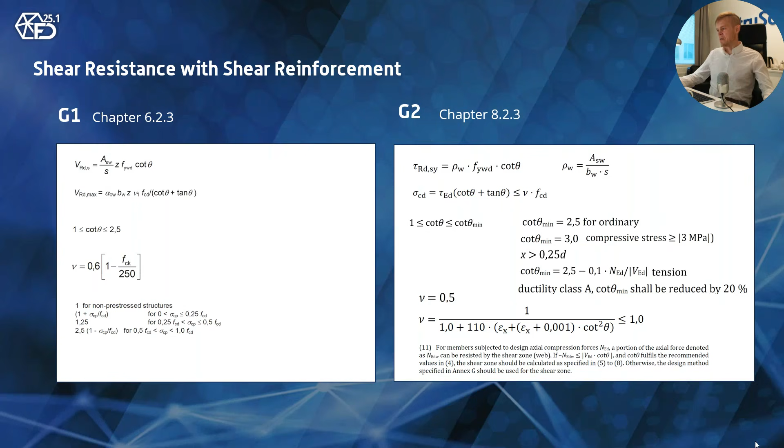Because there's an interaction, the shear is critical in the middle of the beam, and if there's a lot of compression in that zone, then you have to use Annex G. So here are the formulas. You just select anything between 1 and 2.5, and the new code will give you a lot more limitations for cotangent.

And the ductility class is also brought into the equation, so you have to check that one. Let's see how the cotangent is controlled in the new version of FEM-Design for the new code.

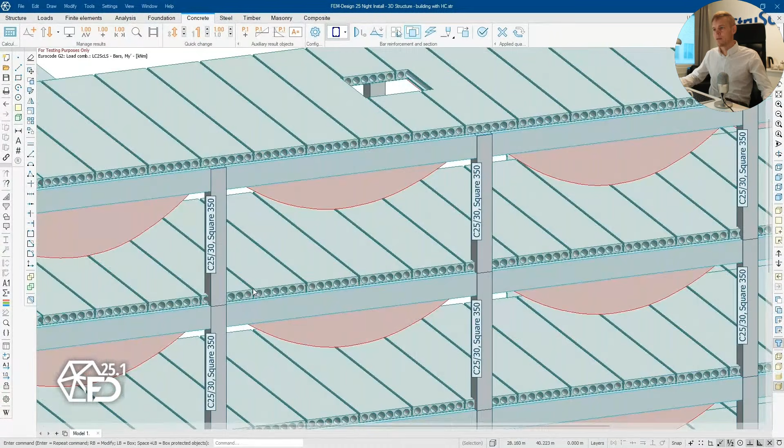So if we try to design anything with the new code, let's go to the properties of the beam, like here. And let's set the cotangent. We try to use something like 2.8.

And I know that there's a tension in this member. It's a part of the bracing system of the beam or the building. And then we get this warning. You can see that 2.8 is larger than the allowed value for this certain member.

And if you go to the shear design part, where we design shear rebars of the plates or the beams, it's here. We can see that we enforce those new cotangent rules here. So everything what is written in the Eurocode is also here and controlled by FEM-Design. It will give you a warning if you try to do something wrong.

And also it checks the ductility class. So when you set the ductility class of shear rebars, you have to be careful because it's now used in the design formulas. And likewise, it's for the plates and foundations.

If you have put some shear rebars, like we have here, we have a lot of shear in this part of the foundations, and then we try to design it. We can set the cotangent. So we have to set the ductility class because now it's checked by FEM-Design.

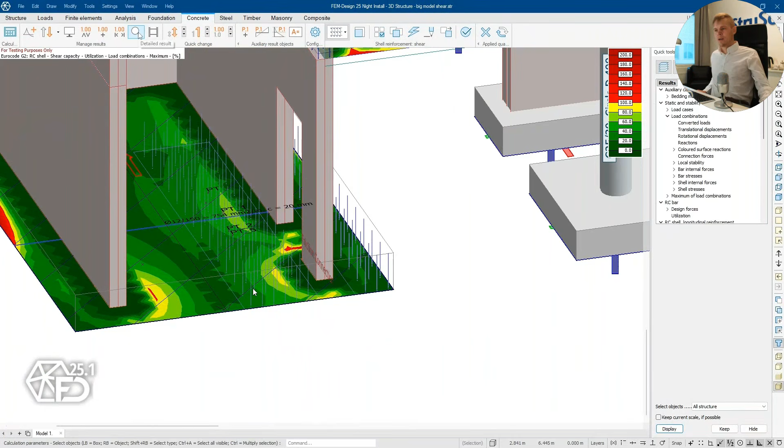Also here you have to be mindful about the angle. So if you have a lot of tension in your foundations, it's no longer allowed to use 2.5. You have to maybe reduce it. But other than that, it's the same as the beam.

So here is the cotangent or the compression strut check, and here is the cotangent value, and also the effectiveness factor 0.4 according to Annex G. And here's the capacity.

Then I want to talk about the second order effects, how they change with the new code. First of all, we have all these three methods what was in the old code. So nominal curvature, nominal stiffness, and general - they are all still in the code, but they are called a bit different. Now it's nominal curvature.

It's for local methods. Then we have a second order linear method, which is the moment magnification method. It's just a different name for nominal stiffness. And then we have the general method, and we also have a method for reduced stiffness.

So it means that you put cracking factors in your model, like 0.3, 0.4, and then calculate the second order linear analysis, and then you get your second order effects.

New thing is this limitation for buckling load or safety factor to buckling loads. It's exactly as the steel code had. So the safety factor for buckling has to be over 10. And if it's over 10, then you don't need to design for buckling or global second order effects.

What else is new? The foundations has to be taken into account, so the soil interaction. That was also in the old code, but not in the second order part. So they have lifted it in here because it's so important when you have a lot of second order effects.

And the new thing is that everything that governs the second order is moved to the Annex O. So there's hardly anything in the new code about the second order - it tells you what you should do in the Annex O. You can see the moment magnifier method, or the nominal stiffness, is still the same formula, but it's just in Annex O. Let's look first at the slenderness limit.

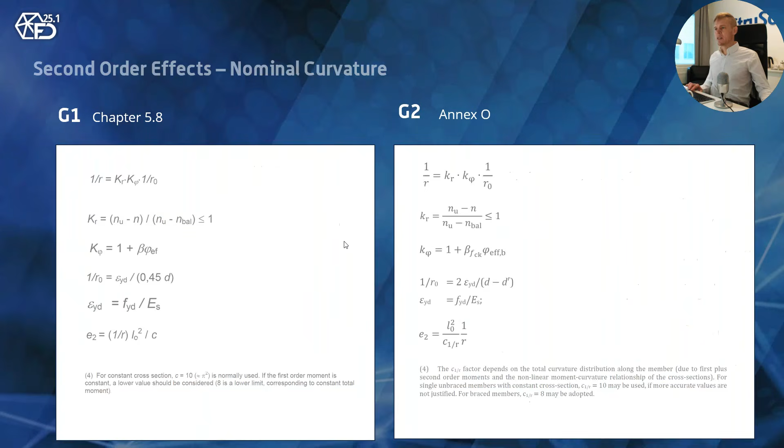The new thing is that the design moment is more specifically defined, though this was also in the old standard. So if you have a non-sway frame or braced system with bending moments at the end of the member, you design your second order effects with this formula. It's also in the new code, but this only applies to braced systems without any significant transverse load. Then your first order moment is this, and the total design moment is this.

There's a bit fancier method with some bending moment ratio in the new code. The important thing to remember is that O14 is the name of the equation for how you approximate the first order moment into what can be summed up as the second order bending moment. The software will ask you what O14 is, so here are a few examples of where you can apply it.

No here, because it's non-braced, so we have significant sway effects and don't need O14. This is a soil retaining basement wall, so we also say no to O14. But here we don't have any lateral loads—we only have eccentricity of the hollow cores, maybe only one side loaded, and possibly eccentricity at the bottom. So we only have an end moment case with no external loading, which means we say yes to O14.

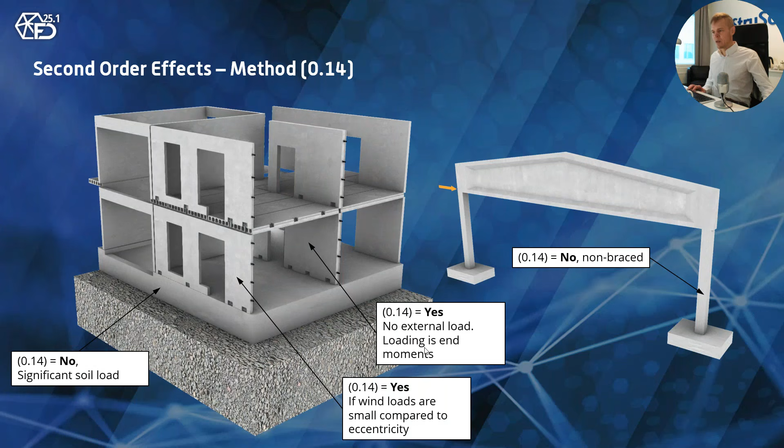Same here—if the wind load is not very high and the wall is really thick, then we say yes to O14. So how do you set this up in your version of FEM-Design?

First, you go inside the settings of the member, and then it asks if you want to consider the bending moments when calculating the limit slenderness. Then comes the question about O14: is it a sway system or non-sway system? And if it's non-sway, do you have any external loading on your element? If you don't, then you select O14.

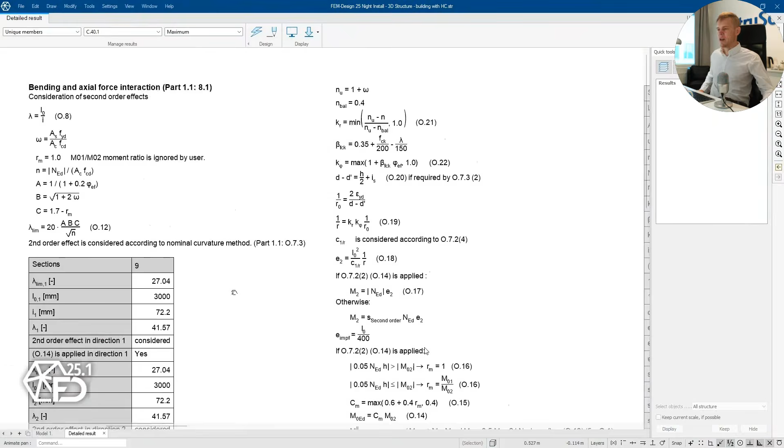If you now look at the report of the element, here are the slenderness checks according to the new code, exactly as in the old code—do you need second order effects for this element? Of course you do in this case. Then you have all the new formulas in Annex O, and you can see we've implemented the new design formulas or design moments. This is the approximation of how you combine the first order with the second order if you have an end moment case, using the bending moment ratio and the second order bending moments.

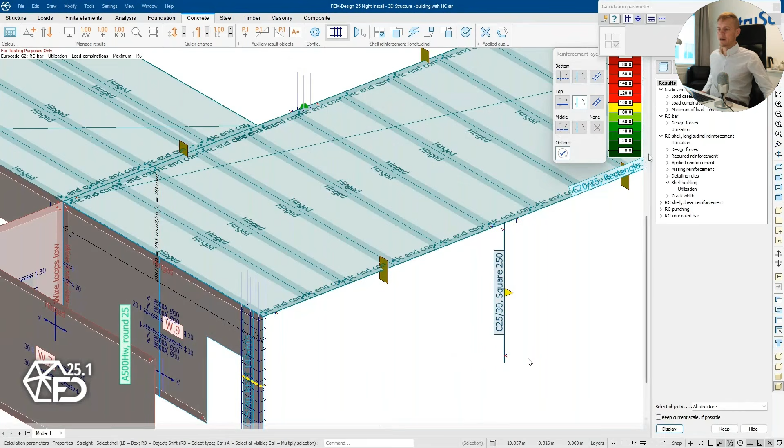If you have something like a wall, the same applies if you want to design a wall like this one—it's exactly the same questions. Do you want to use O14 for this wall? If so, with only eccentric loading on top and bottom and no external loading, then you use O14. Looking at the report of the wall, it looks now exactly like the report of the column, so it's really easy to read—like column design.

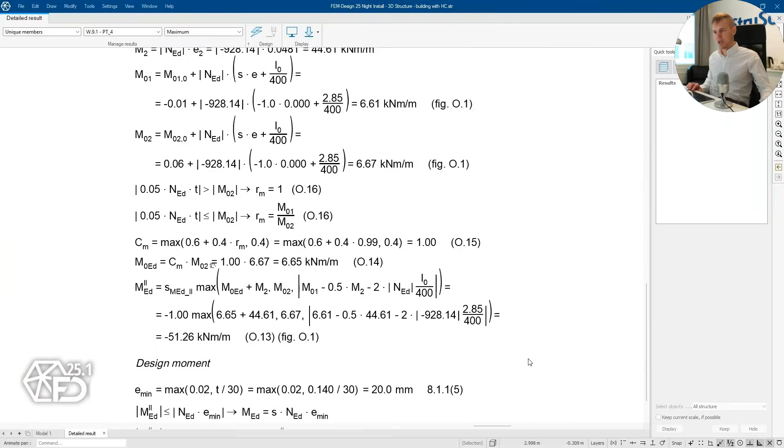You can see we are doing the slenderness checks, calculating A, B, and C factors, then comparing to the limit slenderness. There's the new second order effects according to Annex O, and the design moment is exactly as with the columns—using these formulas to calculate the design moments according to G2.

I hope this becomes your new favorite way to check how things have changed. You can calculate the same structure with generation 1 and generation 2 of the Eurocodes, then compare it yourself with FEM-Design. Thank you.

So we don't have any questions. Yeah, thank you, Joni.